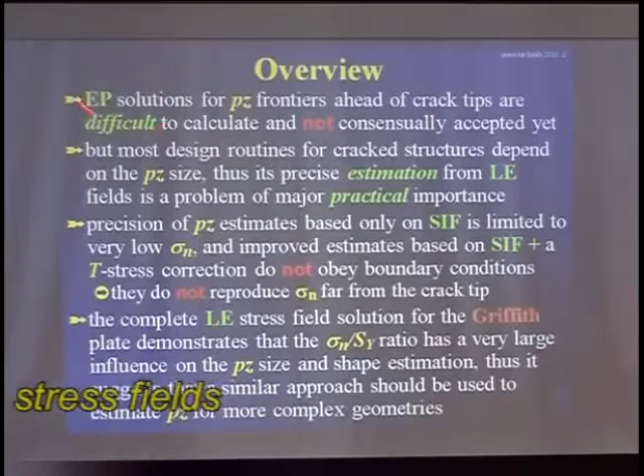Most fracture design depends on the plastic zone shape and size. If you do want to do a fracture prediction, we must assess the plastic zone size. However, plastic solutions for the plastic zone frontiers are a little bit too difficult to make.

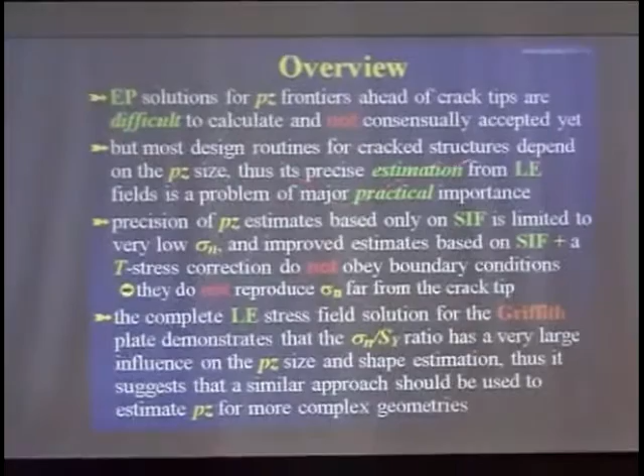Most design routines depend on such plastic zone, and we do use linear elastic estimations for assessing this size. This linear elastic estimation is a problem of major practical importance, both in fracture and in fatigue.

The precision of such estimates, based only on the stress intensity factors, is limited to very low nominal stresses. And when you try to improve such estimates using a T-stress correction, we do not obey the boundary conditions.

I'm going to show you that using stress intensity factor plus a T-stress correction does not solve the problem in a reasonable way. I am going to use the complete linear elastic stress field solution for the Griffith plate to demonstrate that, to prove that in an analytical way.

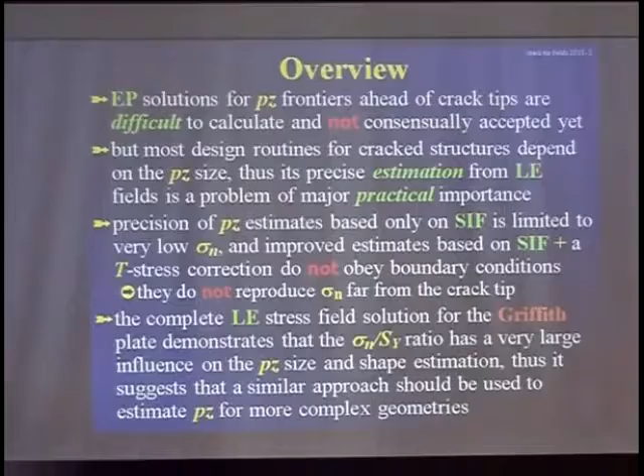Both for teaching and for design purposes, we estimate the plastic zone size from simplified linear elastic analysis, assuming first that they depend on K1, the simplest solution. For plane stress and for plane strain, this can be analytically expressed by simple expressions that everyone knows.

However, assuming that the stress field is a function of the stress intensity factor only is only valid when we are too close to the crack tip, when the distance from the crack tip tends to zero. And that's exactly where the linear elastic behavior has absolutely no sense.

It's quite interesting that, from the philosophical point of view, we use a solution that is not valid where we need it. It's quite interesting. We're used to do that, however.

But it is a nice solution. It's a very nice solution. It's easier to use. However, it's not valid where we need it. Well, anyway.

By the way, elastic plastic estimates, such as the HRR field, do not obey boundary conditions either. They do not solve the problem. It's quite interesting, that also.

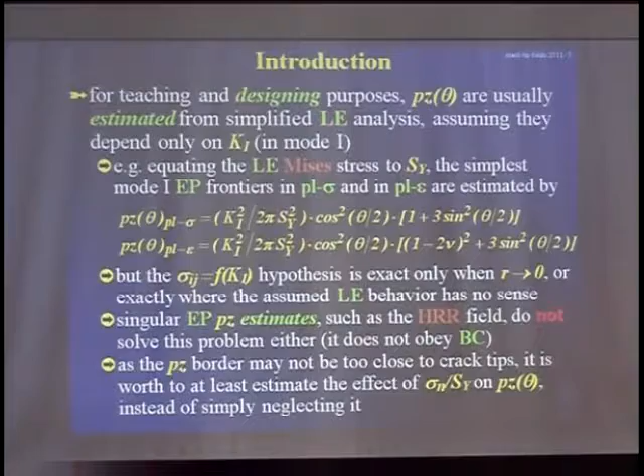Since the plastic zone size border is not too close to the crack tip, we should evaluate this problem from a critical point of view. Let's try to do a very simple evaluation of this problem.

The T-stress solution is the zero-order term in Williams series, but I never was too comfortable with it, because when we enter with a sigma x constant stress to evaluate the effect of the complete stress field in the plastic zone border, we do not obey boundary conditions.

Thus, we can do a very simple evaluation, trying to see what's the effect of the nominal stress in the plastic zone border. How can we do that? A very simple, stupid way to do that is just to force this simple K1 solution to obey the boundary conditions, summing a constant sigma y stress to the Williams solution, just for evaluation purposes.

And the effect of such a brute force approach is quite interesting. The effect of the nominal stress to the yield strength ratio in the plastic zone border, when compared to the simple estimates we use in normal design, is huge, is enormous.

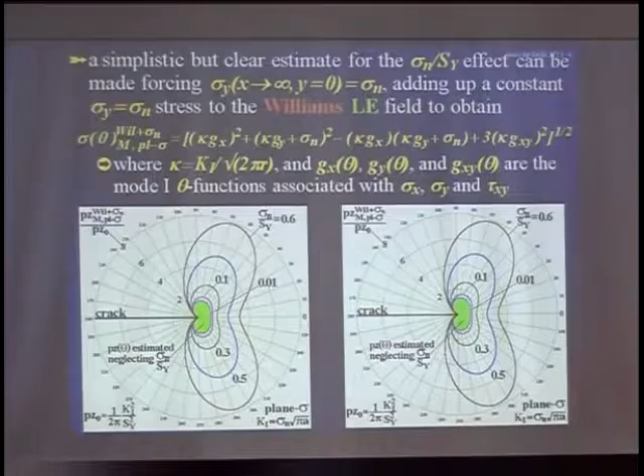Of course, you cannot use this solution for design purposes. This simple estimate is not mechanically sound.

So I decided to solve the Griffith plate problem in the most exact way. But I don't know about you, I don't like too much singular stress fields. I don't know what is an infinite stress.

There is a start to solve the problem using the Inglis plate to simulate the Griffith plate, simulating the crack by a very sharp elliptical notch with a tip radius half the CTOD. Every crack opens under load, so that's a very nice way to start evaluating the problem.

In order to access the A over B ratio, the same axis ratio in the ellipse, I forced CTOD to be equal, the half CTOD to be equal to ρ at the point, the radius of the tip of the ellipse. And using that, entering in the Inglis solution for the elliptical plate.

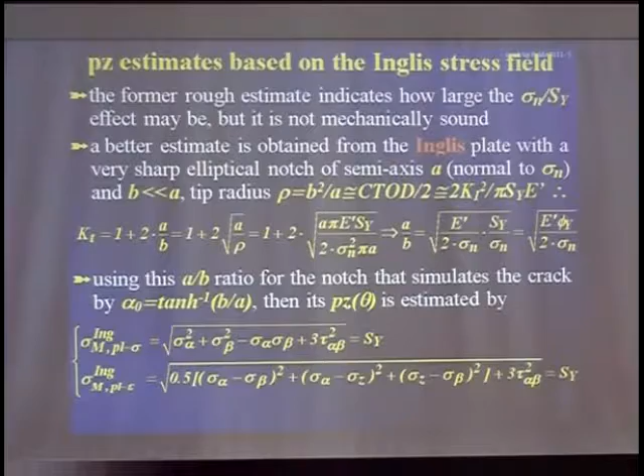I was tempted to write the whole equation, but it didn't fit in just one slide, so please believe me that this equation is correct. I'm using the Inglis alpha beta stresses, equating the Mises component of Inglis stress to the outside. Let's see what happens.

This is the effect of considering the whole stress field in the Inglis plate on the plastic zone border, evaluating the Mises stress composed by the sigma alpha and sigma beta and tau alpha beta stresses for different sigma n nominal stress to yield strength ratios.

This green beam is the classical stress intensity factor plastic zone estimate.

The effect of the whole stress field on this border is certainly quite important. It's not as huge as estimated by just summing sigma y to the classical solution, but it's still very high. Let's see the maximum size of the plastic border, almost 4 times for a yielding safety factor of 1.25 compared to the maximum size of the normal estimate. It's not a 10% difference, it's a 500% difference.

The difference is huge. I was quite happy with this research, very proud of my analytical skills. But I know a lot of mathematicians who always say you cannot avoid the singular field when analyzing a crack.

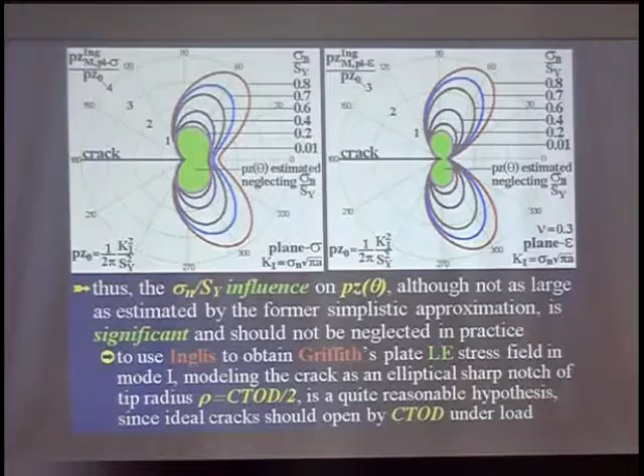Since you cannot avoid the singular field, I decided to do the same exercise using the Westergaard function to evaluate the plastic border size.

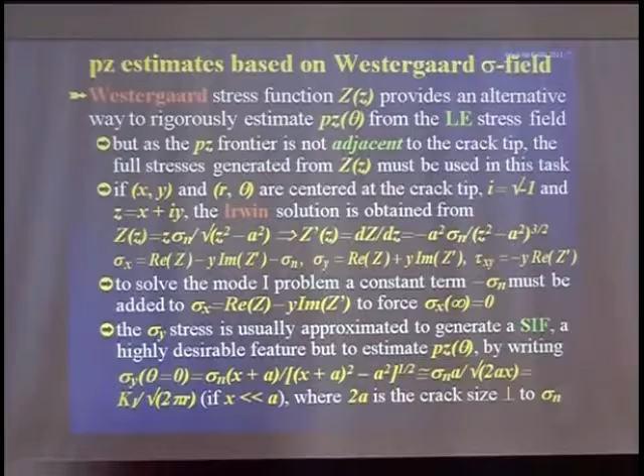However, when we do this exercise, we have to be very careful. If we start with the Westergaard stress function for the infinite plate, we cannot use the Irwin approximation to evaluate the plastic border size. The Irwin approximation to generate the stress intensity factor is a very nice approximation. I love it, because we do generate stress intensity factors that can be calculated. However, we neglect some stress components, and we must avoid this simplification here to assess where the elastic-plastic border is.

If you do this, we arrive at a very similar prediction as the prediction made by the Inglis plate solution. It's quite interesting—well, it should be. We know if an elastic problem has a solution, the solution is unique. It doesn't matter if you use very complex equations for describing a very sharp elliptical notch, or the equations derived from completely different solutions using the Westergaard approach.

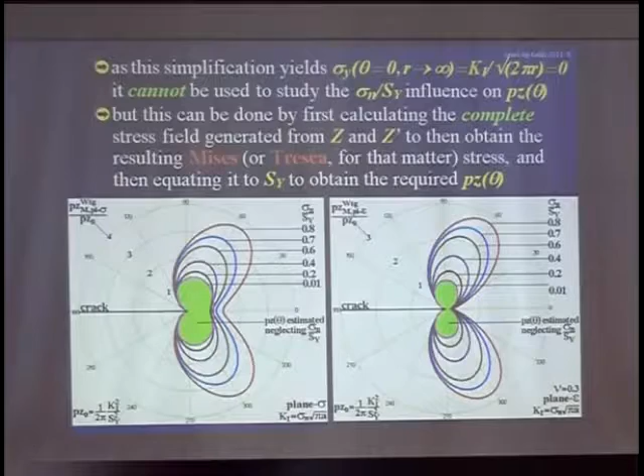In fact, if we look closely at this border, we can generate this border, Tresca border. The equations are very similar for this exercise, and we can compare the solution with the solution predicted by the Inglis analysis.

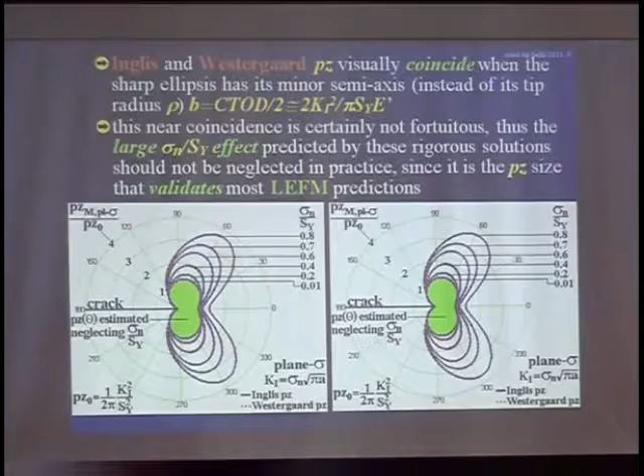Quite interesting—if instead of using the elliptical tip radius equal to CTOD over 2, we use this minor semi-axis B equal to CTOD over 2, we arrive at the very same elastic-plastic borders. We do have those predictions for the plastic zone size and shapes.

I did try to solve the same problem using the Williams series expansion, using the first term, then two, three, four terms, and I found that just three terms are enough to reproduce the Inglis and the Westergaard predictions for the plastic zone size and borders.

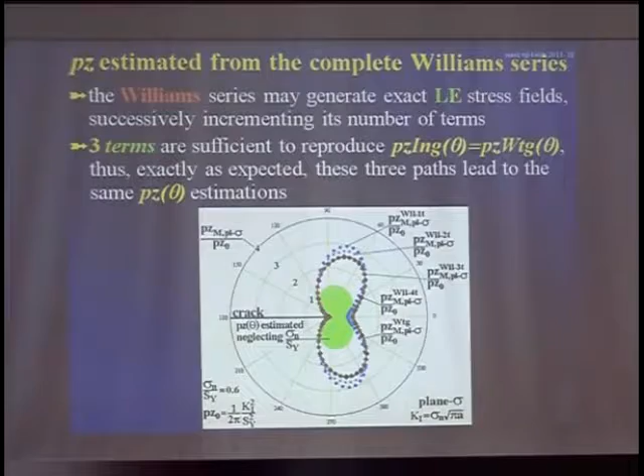That means we cannot use just the first term in the Williams series to get the correct prediction for plastic border size. These are just analytical solutions, no fancy numerical calculations whatsoever. These estimates are based on the correct linear stress field for the infinite plate. They obey all the boundary conditions and all the required conditions for an elastic solution. Thus, they are the very best plastic zone size estimates that can be obtained from a complete linear elastic field.

But such estimates do not obey equilibrium conditions, because the stresses are limited by yielding inside the plastic zone. This problem was recognized a very long time ago by Irwin himself. The first correction for the plastic zone size was proposed by Irwin. He introduced the stress intensity factor, and I don't know why he didn't solve the complete problem, just the theta equals 0 approximation.

I was tempted to say that this recognition of the major influence of equilibrium conditions was made before I was born, but no one would believe that anyway. But it was a very long time ago. So I decided to check the effect of the equilibrium conditions and compare them with the classical T-stress approximation for the plastic zone.

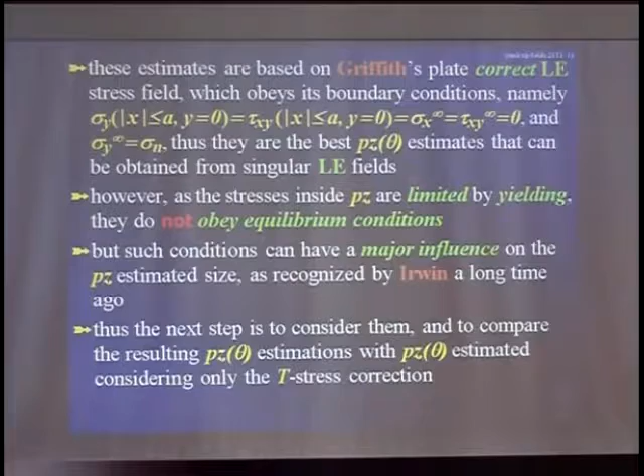However, the K1 stress intensity factor plus the T-stress field is just a simplification of the complete linear stress field and cannot reproduce the boundary conditions on the Griffith plate. Therefore, it's quite interesting to compare the plastic zones estimated from these

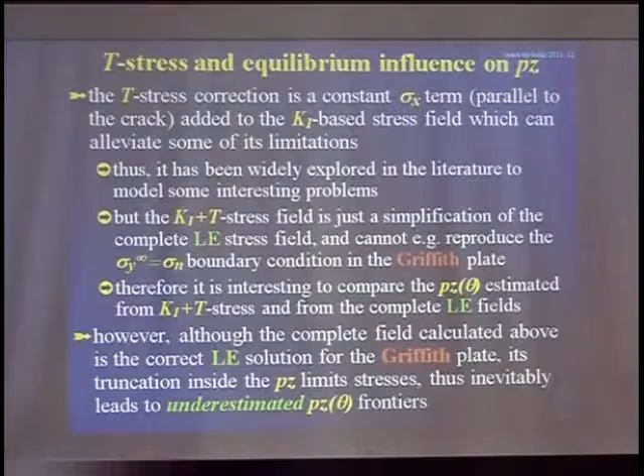usually accepted good correction with the exact solutions, just to see what happens. However, we do need to use equilibrium conditions to avoid underestimated plastic zone size. We did propose a lot of interesting corrections. We do not have an exact one.

The first idea was to equilibrate it for every slice, just the y component of the stress. This is one way of guaranteeing equilibrium. So we have an equation that guarantees for every theta position that the y component obeys the equilibrium condition.

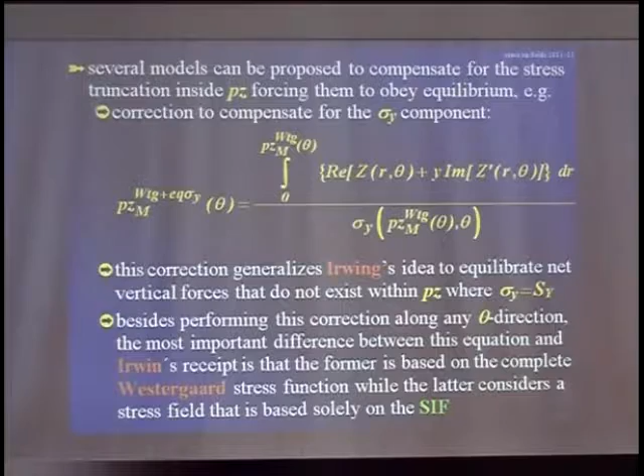Another way to do that - I don't like this very much, but this is my student's idea and he is very proud of it. He said, well, if I can use a constant sigma x stress as a T correction, why not use a constant correction for the equilibrium condition also? And he did propose this equation for this correction.

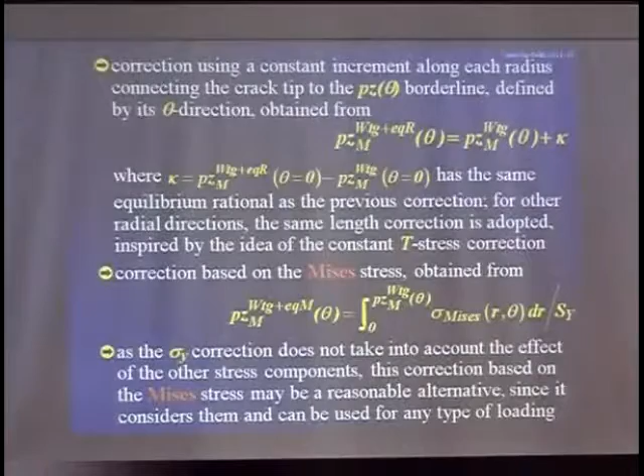We equilibrated the Mises component also, and did the same exercise for the traction component. That's a little bit more interesting from a theoretical point of view. And such equations were used to correct the plastic zone size for every theta position around the tip.

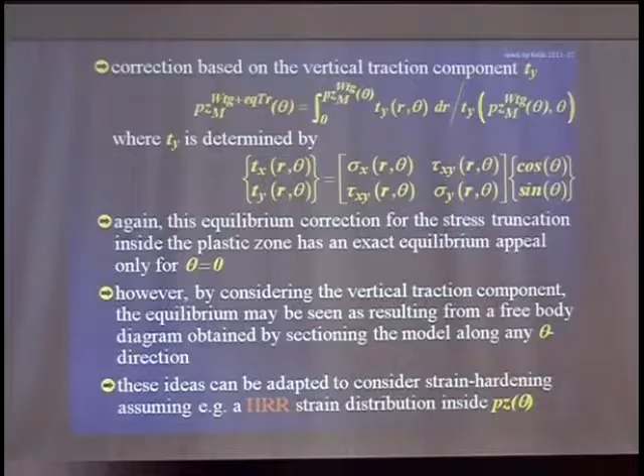What I like most about those ideas is they don't need to be used only with non-strain-hardening materials. I'm going to present the solution for zero strain hardening, for perfectly plastic materials if you like that name. However, I'm also going to show that you can use it considering strain hardening if you want to, in less than 2 minutes.

Here we have plastic zone estimates considering equilibrium. Here in gray is the T-stress estimate. Here is the equilibrium correct estimations considering the tractions, the y component, the Mises component - almost the same. My student's idea, and the classical solution.

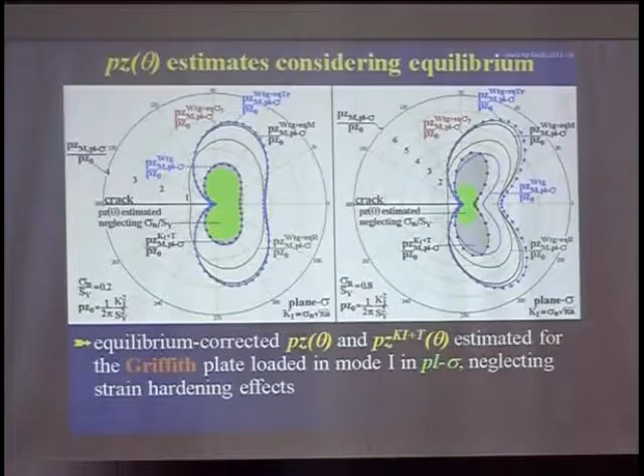For plane stress, this is for a sigma n over SY ratio of 0.8, with a 1.25 safety factor against yielding. This is the same kind of study for plane strain. Let me be fast to avoid problems with my director.

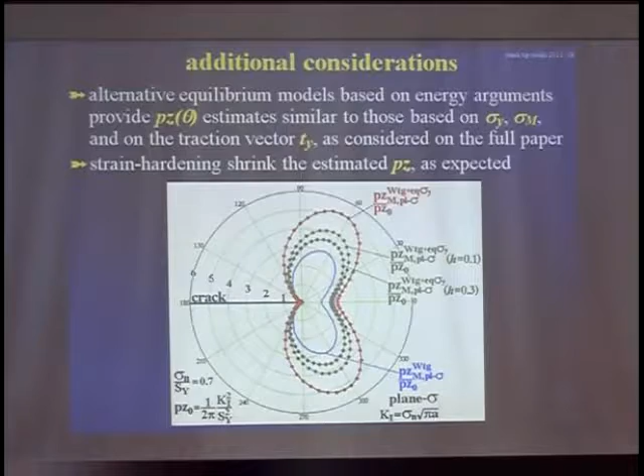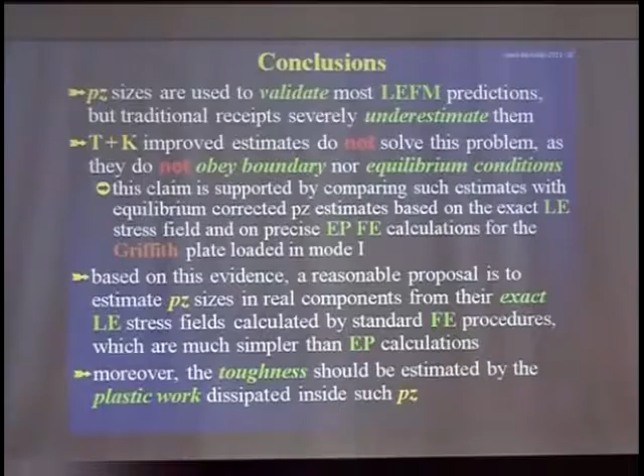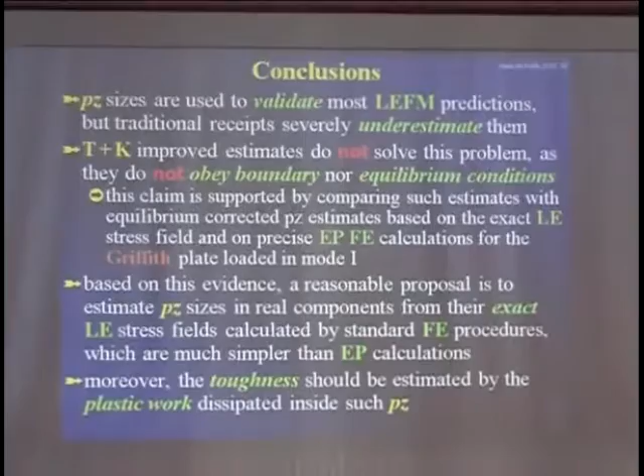Okay, let's arrive at the conclusions. Plastic zone sizes are used to validate most fracture predictions, but traditional recipes do underestimate severely the plastic zone sizes. T-stress correction in a K-controlled stress field does not solve this problem because these solutions do not obey boundary conditions nor equilibrium conditions, and thus underestimate plastic zone sizes.

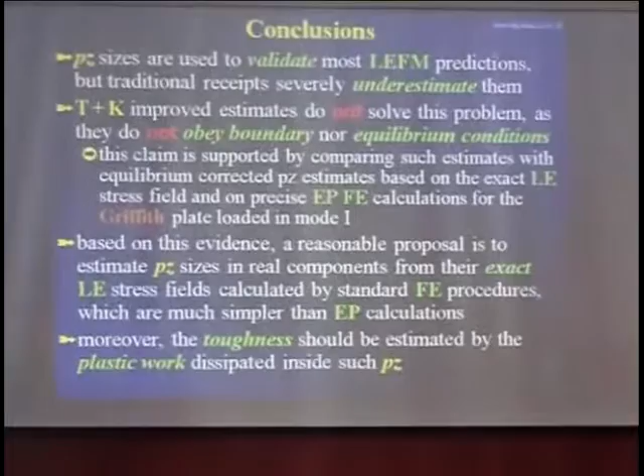This claim is supported by an exact solution in the Griffith case - an analytical one, no question about that.

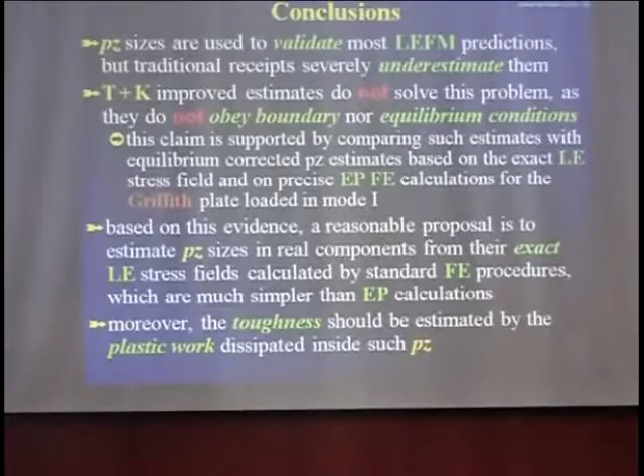And then evaluate the plastic work done inside the plastic zones to arrive at the toughness. I guess that this way our predictions for practical applications would turn out to be much more reliable than they are today. Thanks.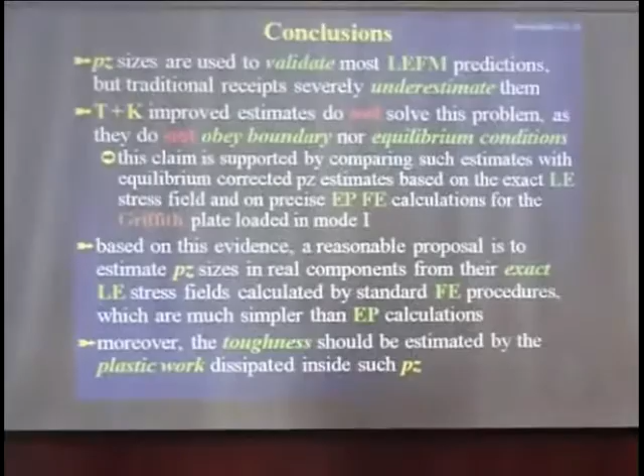Okay, a better way to estimate plastic zone size. Anybody wants to buy it? Anybody wants to ask a question about it?

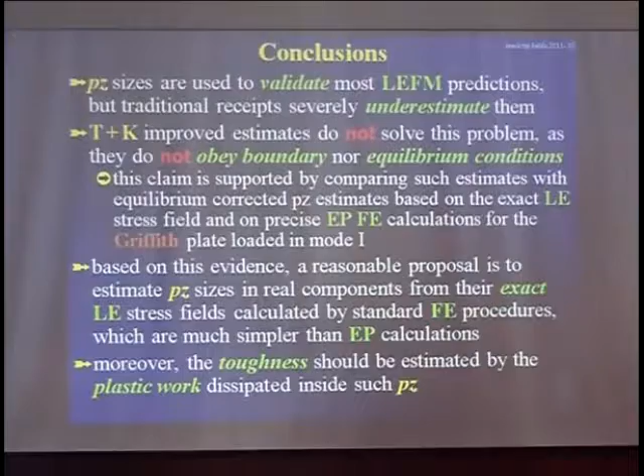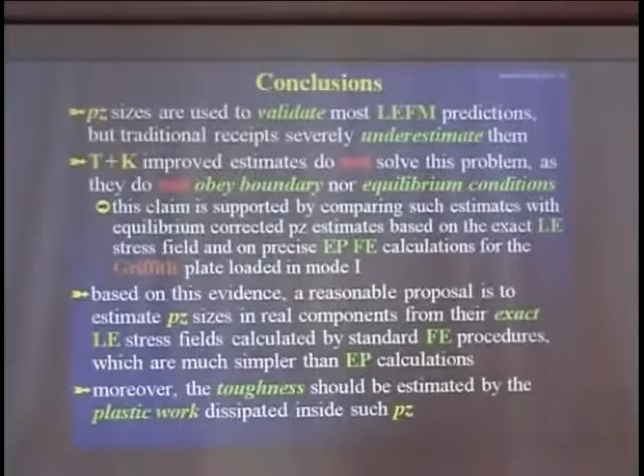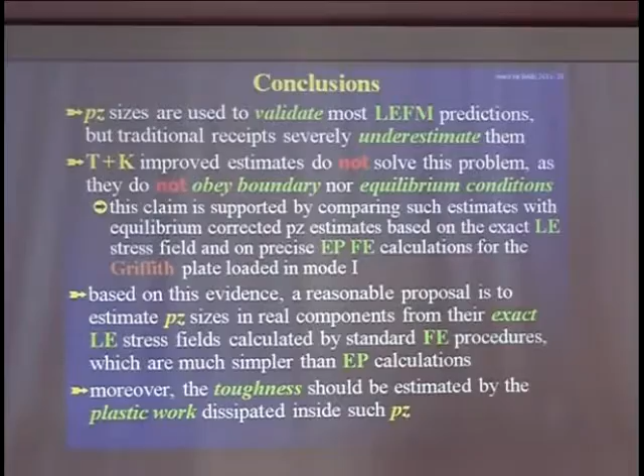So, how much different is your correction to the Irwin one, the classical one? The Irwin classical one is correct for theta equals 0. Yes, moreover it is based just on K1. So it does turn out to be underestimated as compared to the solution. Underestimated? So yours will be bigger. Yes, it is. So in reality, even after I correct according to Irwin and find the new size of the plastic zone, the corrected one will still be smaller than yours.

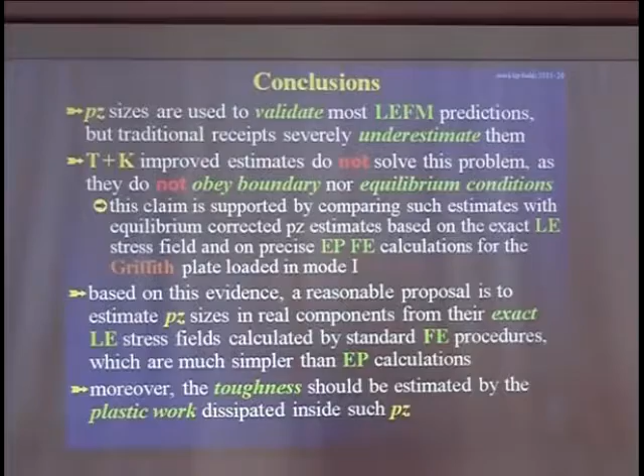Yes, it is not a function. I tell you why: the Irwin correction is not a function of the sigma n over SY ratio. It does not depend on nominal stress. And I have shown you that the nominal stress effect, the ratio between the nominal stress and the yield stress, is very important to estimate the plastic zone. As it should, unfortunately, it does depend on the ratio in a different way.

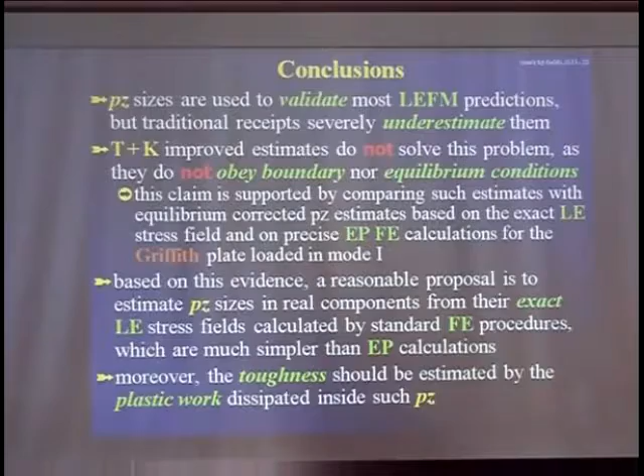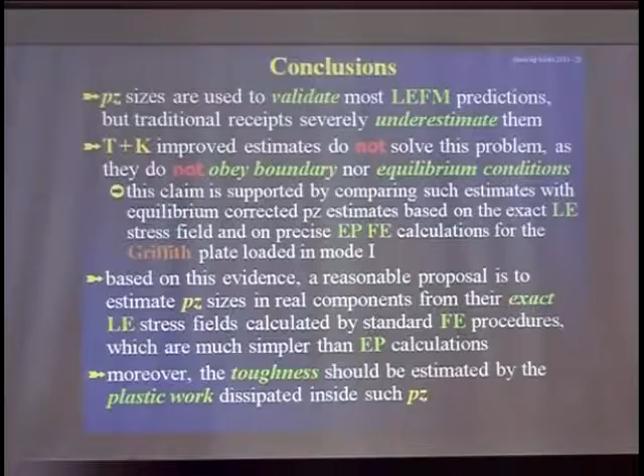I would like to say we do need experimental validation for that. However, this proposal is a nice one to get a specimen to validate that. If we go for a CT specimen and things like that, we don't have an analytical solution. Using a large plate with a small crack, the analytical solution is there. Then we can check these results, knowing what they're looking for. It's better than just measuring to see what's happening.

Sure. Yeah, this is just a comment or question concerning your last sentence, so we got toughness. Yes, and I like that sentence. Well, I think that this is to measure the dissipation. It's not enough to get a toughness because you should have a plastic work. But it does work, that's just not the same. You need a plastic work done inside, plastic outside. And now you have to estimate the fracture strain inside the plastic zone.